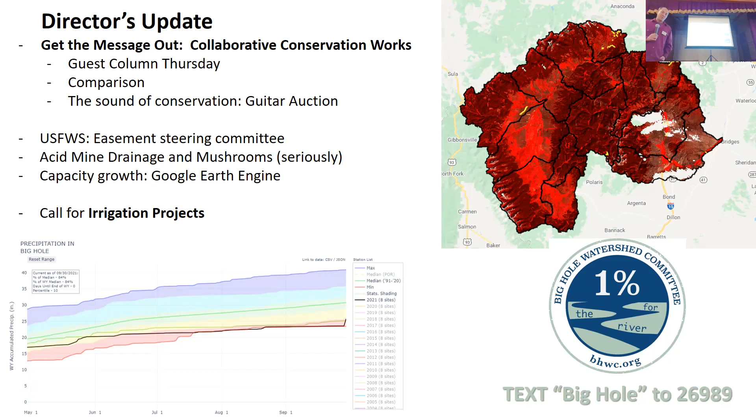His name is Michael Reed. He's the wood buyer for a guitar company, so he procures the wood that gets turned into guitars, and he reclaims wood from abandoned farmhouses in Brazil, harvests it, brings it over, and has stuff made out of it. So this guitar was made out of a 150-year-old farmhouse that was decommissioned - they took the pieces and had a luthier put it together.

So that's exciting - that's the auction, it'll be a 10-day auction. I think it'll launch tomorrow, but if not, it'll be next Thursday, just depends on getting some stuff on eBay set up.

If you know anyone interested in music, plays music, or collects guitars - I figured we wouldn't have an extensive contact list here in this group of those types, so I went to Logjam Presents, a music producer in Missoula. They have a mailing list of 65,000 people, and they've donated about $800 worth of advertising, email newsletters, and social media to get the word out about this thing. So I'm hopeful someone will like what we're doing, want to contribute to conservation, and want an awesome guitar. I thought I'd bring it to show you guys.

Couple other little things on my plate. U.S. Fish and Wildlife Service is starting to convene a group. They've been hearing a lot about interest in easements in the Upper Big Hole - a lot of landowners expressing interest - and they want to convene a group that looks at the progress and status of those and tries to set themselves up, Fish and Wildlife Service, to potentially participate in those and help get some of those actions on the ground as part of grand conservation. So I've been invited to sit on that steering committee, very early stages, so I wanted to let you know about that.

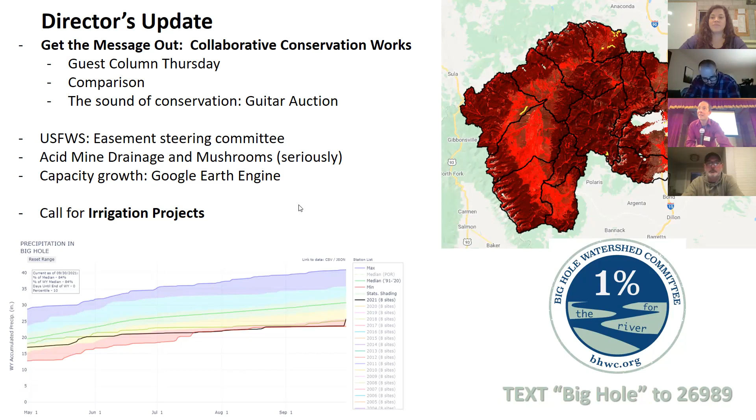Steering committee, any updates? No updates. No updates. Okay. We'll meet soon, I'll send out an email to get us together. We're due for our 3rd quarter.

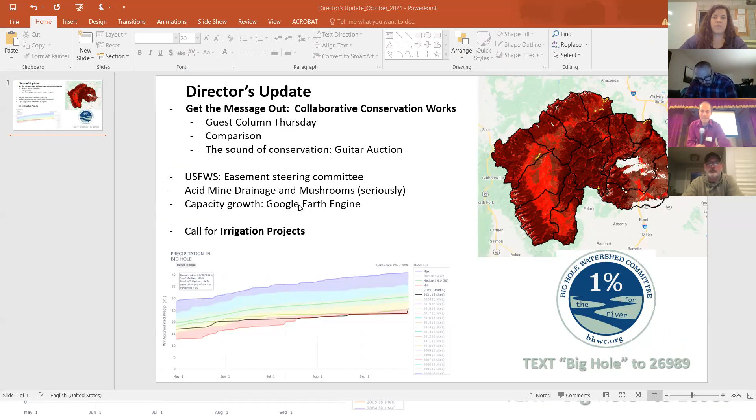Okay, Tana, you up? Okay, yeah, do that. Yeah, that's better. Make sure we get this right, and I will leave you the mic.

All right, I just have a quick wildlife update today. The Range Rider program just wrapped up September 30th, and our Upper Big Hole Range Rider, Chet Robertson, patrols 6 U.S. Forest Service grazing allotments for 7 livestock producers in the Upper Big Hole, monitoring for carnivore activity and looking for dead or injured livestock. He does this to help livestock producers and large carnivores share the landscape. His primary tasks are finding and reporting carcasses so producers can secure reimbursement for losses, keeping wolves moving and aware of his presence, and informing producers of carnivore locations and activities.

So those are the basic tasks of Chet's job, but he also ends up doing a lot of other things that provide indirect benefits to producers and the watershed. A couple things he did this year, besides tracking wolves and bears - he also helped get a wildfire under control. He found a little lightning strike and contained it with his chainsaw, then called the Forest Service and the correct authorities who came and got it under control.

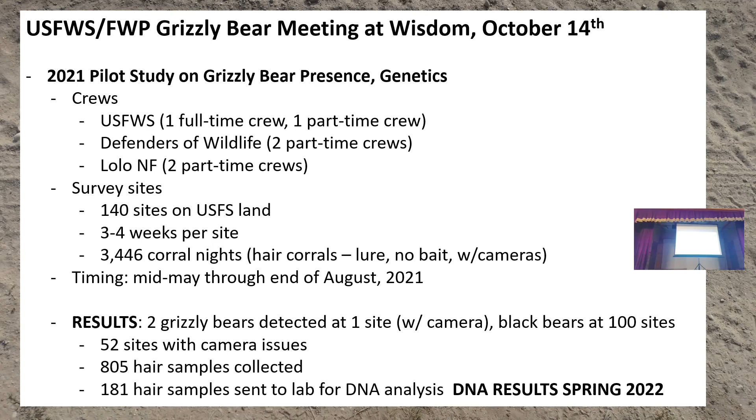805 hair samples were collected and 181 were determined to potentially be from grizzly bears and sent to a lab for analysis. But those DNA results won't come back till spring. So that's a little bit about the study, but unfortunately we don't know the results yet. As soon as we do, we will share them.

So what can we do to prepare for grizzlies? Just be bear aware, carry bear spray, make noise, travel in groups whenever possible, and be especially careful when you're out there hunting. And on your properties, secure bear attractants like livestock feed and trash.

I just wanted to mention that Beaverhead County and People and Carnivores are ahead of the game, because those of you who live in the Big Hole probably noticed they installed bear-resistant lids at the transfer stations. It's pretty slick - you just go up and push a button and it opens, throw your stuff in there and push the button again and it shuts. So kudos to them for being ultra prepared for bears.

And that's all I've got for wildlife. Dean or Jim or anyone else need to add?

I'm involved in work with Western Landowners Alliance on predation, and they have a meeting once a month. Looking at the 4 C's: compensation, control which includes lethal, collaboration, and conflict. Just looking at predation throughout the West and trying to figure out ways to address the impact to the predator and to the livestock operator. Spent quite a lot of time on that. Out here where we're in open space, it's really difficult to use a lot of the practices like fladry and stuff like that.

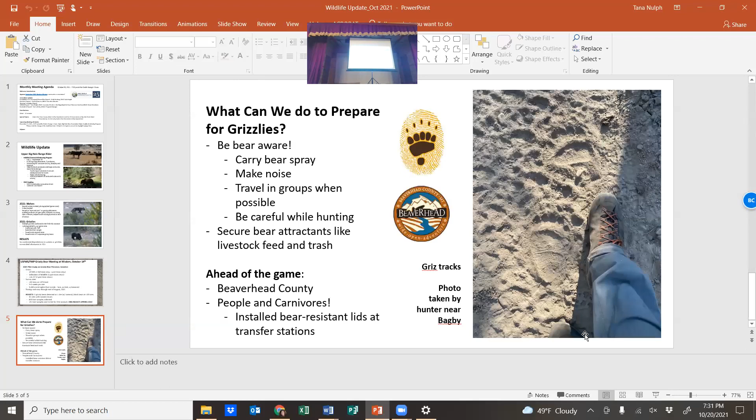Well, I appreciate it, Jen. Thank you for taking the time to be up on those types of things and reporting out to us. Okay, wildlife, we'll move on to Ben. You ready? Should I do it?

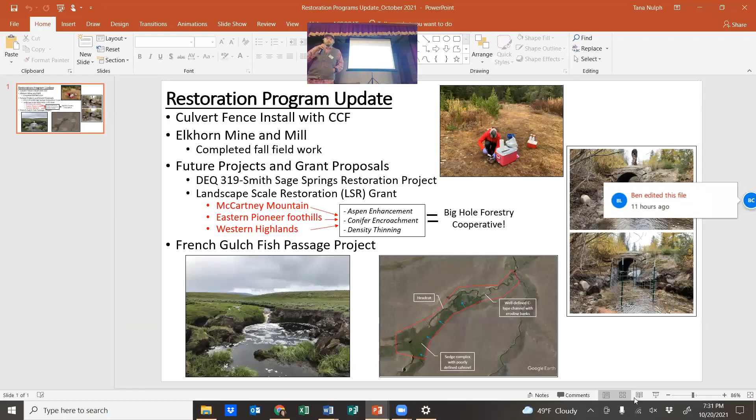Okay, I had a productive month in the restoration programs world. I started off the month - I got invited to install a culvert fence with the Clark Fork Coalition. It was outside of Anaconda on Foster Creek. I know it's not in our watershed, but I thought it was a great opportunity to continue learning about these beaver mitigation projects and these structures.

So I went out with Elissa Schott with the Clark Fork Coalition. She's the beaver mitigation specialist, and she helped us on the 2 projects we did last year. It's good to see a different scenario and learn some of the nuances involved with these projects. There's a before and after photo - basically what the beavers were doing was clogging this ginormous culvert and causing heartache for the landowner. These culvert fences allow the beaver to maintain their habitat and stay on the landscape, and also let the landowner be happy and satisfy their goals too.

So I mentioned it last year, but if you guys have any of these beaver conflicts, then reach out. I think the more and more we do these types of things, we can start to have the capacity to help you guys out and do good things as far as beaver mitigation projects.

We had a productive couple days up at Elkhorn. Pedro mentioned the new grant that we got. We went up there and completed our fall field work.

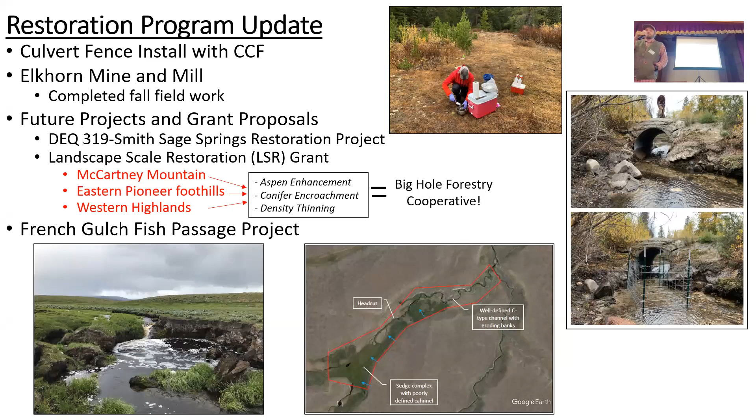Right? Any questions? Right? Okay.

We're open for any additional business or things not on the agenda. Anyone want to cover anything that wasn't covered yet? Things coming up? I have a question for Ben, really quick.

Did you guys get water samples back from Elkhorn results? We did the round 2 that Ben and I went out there, and we got those samples back. Everything's pretty much just the way it was last year, except we did sample below the waste rock pile, and that's super hot.

Max, did you catch that? He said the samples we got was a redo of last year's, and everything's the same except just below the waste rock pile is super hot. We did some new sampling there, and it's of concern for sure.

So you all know, we're in this characterization phase up there, figuring out where the metals are, where they're hottest, what the volumes are, and that's going to lead into the design for how to remedy the site. We have to have a good idea before we start digging around of how deep are we digging and where. That's the phase we're in.

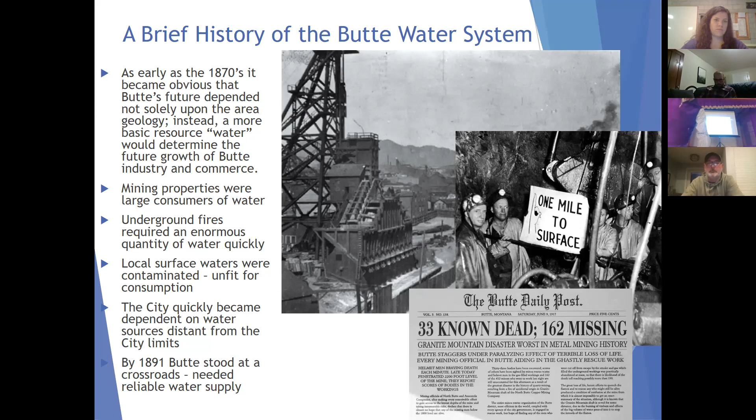In 1891, Butte stood at the crossroads and needed to come up with a reliable water supply. The Butte City Water Company was organized, with Engineer Eugene Carroll in charge of the utility. Over the next decade, Carroll oversaw the transformation of the system from one with a daily capacity of less than 1 million gallons to one capable of producing 13 million gallons a day.

Also back in 1891, the Butte City Water Company promised to spend $2 million to develop the system. $2 million - I don't know how much that is today, but that's a lot.

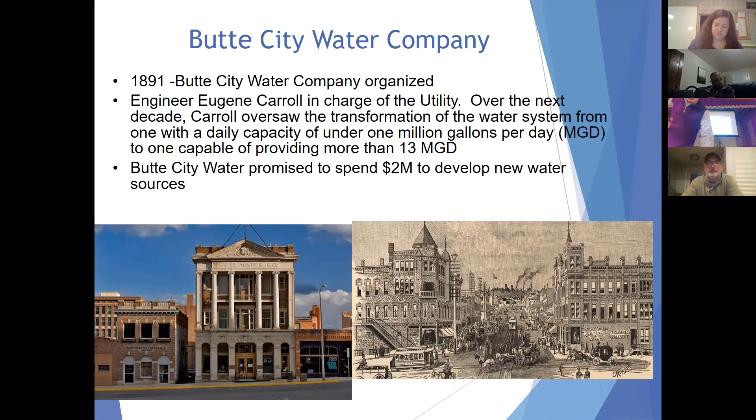So anyway, the first thing they did was build the Basin Creek Dam, constructed from 1892 to 1895. In 1896, a flume from Fish Creek, on the other side of the divide up in the highlands, was built to run water from Fish Creek to the Basin Creek Reservoir. Then in 1897, Basin Creek number 2 dam was built. During that time, the city still didn't have enough water to provide for mining and for the potable water system.

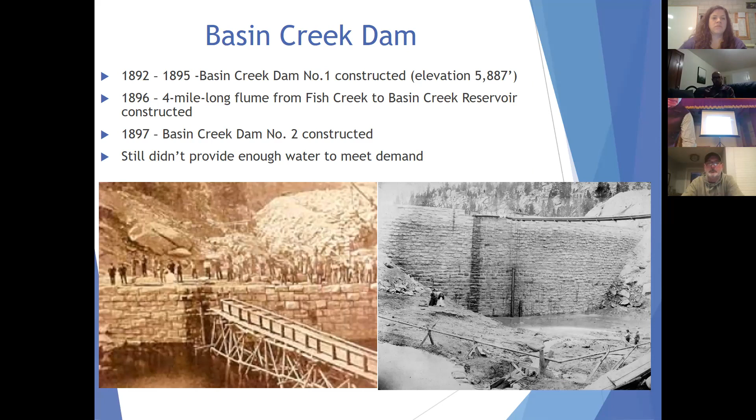Let's just keep going here, and feel free to ask any questions when you'd like. Question: The water rights on Basin Creek and Fish Creek, do you have preceding rights? Coming up, I got this.

Anyway, in 1899, the financial panic hit and the Butte City Water Company went into receivership. In 1901, the company reorganized as the Butte Water Company, and guess who the primary owner was - the Anaconda Mining Company. Question: Receivers, is that like bankruptcy? Bankruptcy, yes. So everybody's a little bit familiar with the ACM. Anyway, of course, the Basin Creek water supply couldn't keep up with demand.

So the city went elsewhere. The best place they could go was the Big Hole River and also the South Fork supply. Of course, the Big Hole is on the other side, on the Atlantic side of the Continental Divide. They pumped water 27 miles from the pump station into Butte, and it was the only system at the time in the United States that moved water from the Atlantic drainage to the Pacific drainage.

Pretty unique in itself. It also involved construction of the South Fork Reservoir up on Fleecer, a 13 million gallon reservoir. From the pump station, they pumped it approximately 700 feet of head from the river up to South Fork, and from South Fork, gravity carried it all the way into Butte. By 1902, the system provided an additional 4 million gallons to the city.

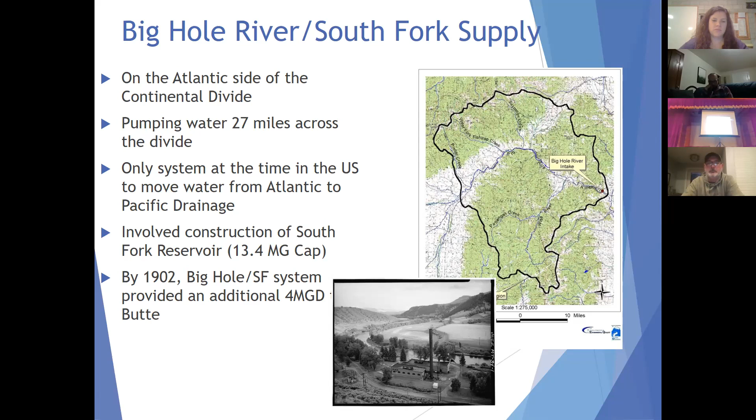They still didn't have enough water, so completion of the system required construction of the Moulton Reservoir. The Moulton Reservoir is about 7 miles north of Butte, north of Walkerville. It was completed in 1907 with a 224 million gallon capacity.

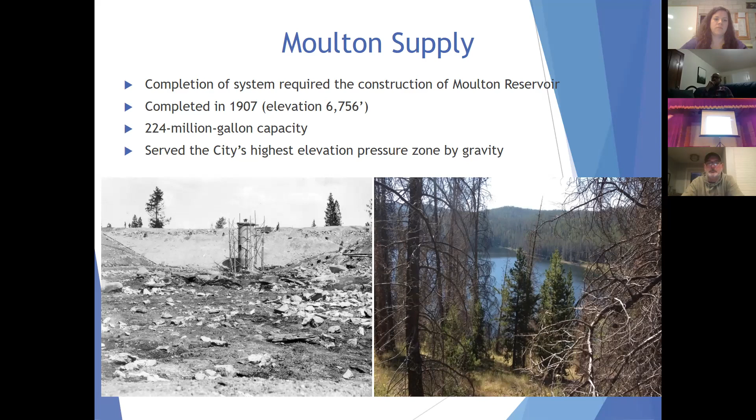That reservoir supplied water to the north end of town, the upper elevations of the system, the highest pressure zones. Butte's pressure from top to bottom is a little over 2,000 feet, so quite a bit of pressure differential there.

Just a little bit more on the history. From the 1920s to the 1970s, the company did make profits, but invested very little in major capital improvements. It was the Anaconda Company, and if you were a shareholder, most of that money was going into pockets from dividends. They didn't put any money into the infrastructure for over 50 years.

Then in 1977, the Anaconda Company was sold to Atlantic Richfield. In 1986, Dennis Washington bought the Anaconda Mining Company, and along with that came the Butte Water Company.

Then in 1990, a class action lawsuit was brought against Dennis Washington by a group of concerned citizens because the water company wasn't providing safe water. Back then, the Department of Environmental Quality issued a boil order in Butte—you had to boil your water before you could drink it. That's terrible, all I can say.

Then in 1992, the Butte Water Company was sold to MERDI, the Montana Economic Revitalization and Development Institute. They ran it for a few years, and during that time, the Fish Creek pipeline was constructed to replace the old flume from Fish Creek.

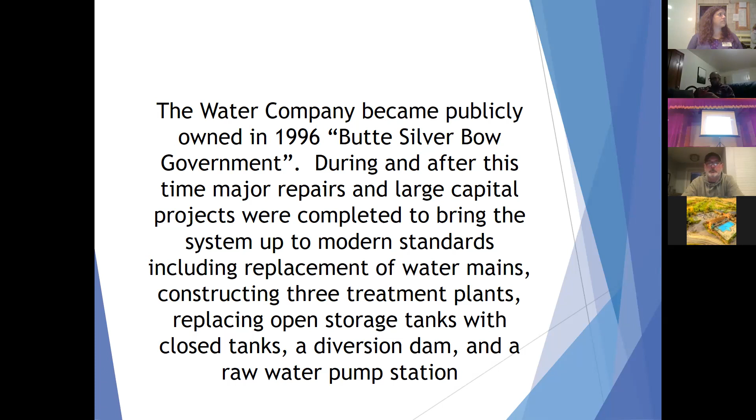It was maybe a 20-year loan, so they're paid off now. So the city of Butte has brought the system up to the standard where it should be today. They invested in the system. We feel that in order to have a good economy, you have to have good infrastructure, and along with good infrastructure, you have to have the resource. We believe that we have the resources, the water.

Here in Montana, especially in Butte, we're right on top of the Continental Divide, so there's no users ahead of us. We're the first user, so water quality is excellent, whether from the impoundment or from the river. We feel that way about rivers too, everybody knows how we feel about the Big Hole River.

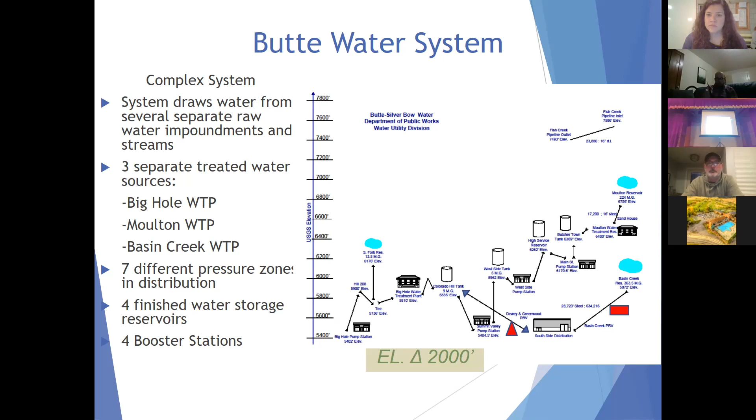The Moulton water treatment plant was commissioned in 1995, with a capacity of 2 MGD. The Moulton reservoir consists of a smaller upper reservoir, 11 million gallons, and a lower reservoir of 224 million gallons. Basically, the upper reservoir, we hold that water back until late summer, just for additional storage. It's not very big, but it helps.

Up in the Moulton drainage, the watershed isn't very big. You don't get a lot of runoff there, but in the past several years, because of the beetle kill, our reservoir is filling to more of capacity, because there's nowhere for that water to go. The trees aren't absorbing it, so it's running into our reservoirs. It's working out a little bit better for us.

It operates to take advantage of the opportunity to serve the city's highest pressure zones. As for the water rights, it's basically Yankee Doodle Creek. The priority date on that was, I believe, 1907. The maximum flow rate is 4.3 CFS, and the maximum volume is around 3,100 acre feet. Basically, we can take as much as we can out of there based on the yield.

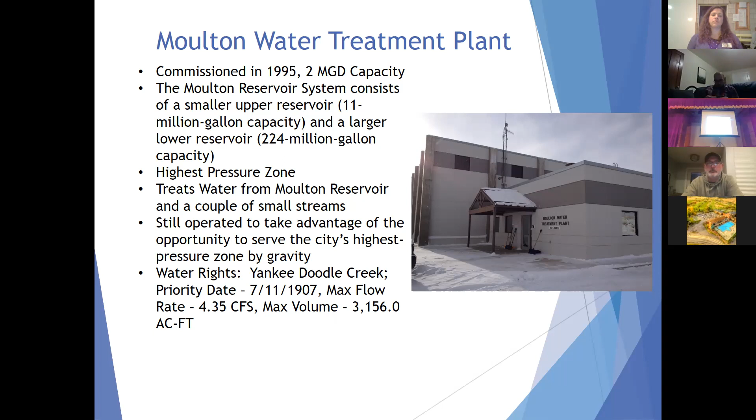The Big Hole water treatment plant, commissioned in 1994, treats water from the Big Hole River and the South Fork Reservoir. The diversion dam alongside the river directs water into the pump station. The pump station is equipped with 5 vertical turbine pumps, each around 250 horsepower I believe. The water is pumped through a 36-inch transmission main, 10 miles up to the Big Hole water treatment plant, on the Feely Hill exit there, right up by Tim Garrison's place. Water from South Fork Reservoir flows by gravity into the water treatment plant through a 24-inch main.

The new diversion dam was constructed in 2010, and the new pump station was constructed in 2012. But the thing is, the water treatment plant, when it was built, was rated as a 16 MGD plant. I know when I was an operator, it's like buying a new car - it says 160 miles an hour, and you put your foot on the gas, and it'll do it for a little while, but you can't sustain that.

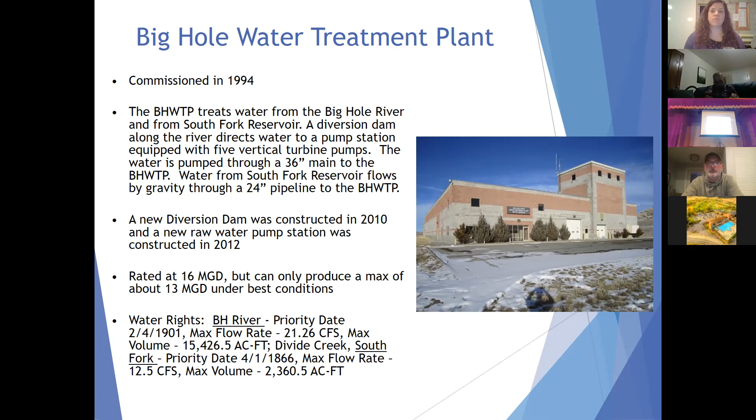Then our next one, this is Basin Creek Water Treatment Plant. Water from the 363 million gallon reservoir is treated with the new water treatment plant. This is a state-of-the-art water treatment plant completed in 2017, the first plant in the United States to employ ceramic membrane technology. The plant has a capability of treating 7 MGD a day.

Membrane technology has been out in the world for 25 years now. Most membrane technology goes through a tube, and the warranty, the life cycle on a polymeric type membrane would be maybe 5 to 7 years. With ceramic, on these membranes since 2017, we have a 25-year warranty on each one. So they cost a little bit more upfront, but for 30 years it's a lot more efficient.

It's a pretty interesting plant. All I wanted to show, we have 400 modules. You don't see any water in this plant. Water comes through all these pipes and through these modules, and it just goes out the door. I'll talk a little more about Basin Creek as we move along, why it's so important to the city of Butte and to the Big Hole River. That's a point I really want to make here. There's 400 modules and one recovery unit.

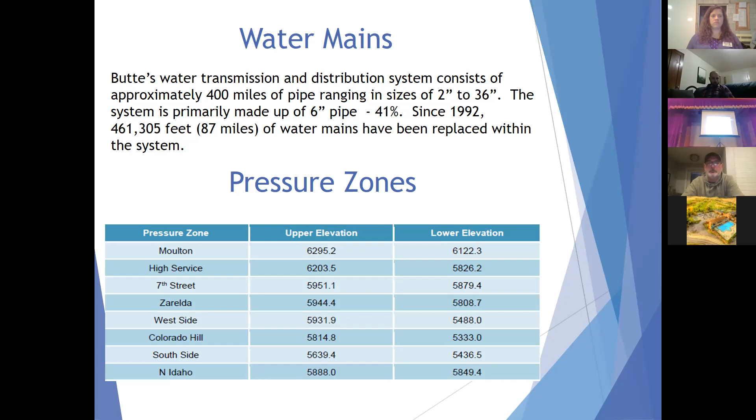As for storage tanks, we have 4 storage tanks. Colorado Hill storage tank was built in 1993, and it's a 9 million gallon storage tank. Coming into Butte from Rocker, look to the south and you'll see that tank up on Colorado Hill. All the water that we pump from the Big Hole system goes to that tank. Elevation-wise, it's sitting pretty high - we can gravity feed water all the way up to a couple blocks below Park Street and still maintain adequate pressure.

Then we have the west side tank. If everybody's familiar with Butte, up by the Big M is the west side tank - that's a 5 million gallon tank. We have a pump station there that's Big Hole water for the most part - we pump water from Colorado Hill up to the west side tank. So basically the Big Hole is supplying the entire Butte Hill and a majority of the south side of Butte.

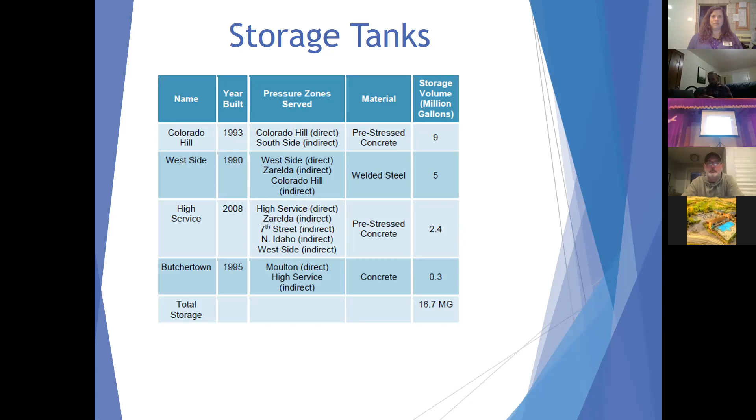Then we have the high service tank north of Butte, that's the 2.4 million gallon tank, and the Butchertown tank, which is right at our base at our Moulton water treatment plant. These tanks help maintain pressure in our distribution system in each zone.

That transmission pipe main from the Big Hole to Butte, I don't know if I covered that, but it used to be wood stave pipe back in the early 1900s, wood stave with bands around it. Then in the mid-1970s that main was replaced with 36-inch used pipe. It was used, not new - they bought it in Canada, got a sweet deal on it, and it wasn't lined.

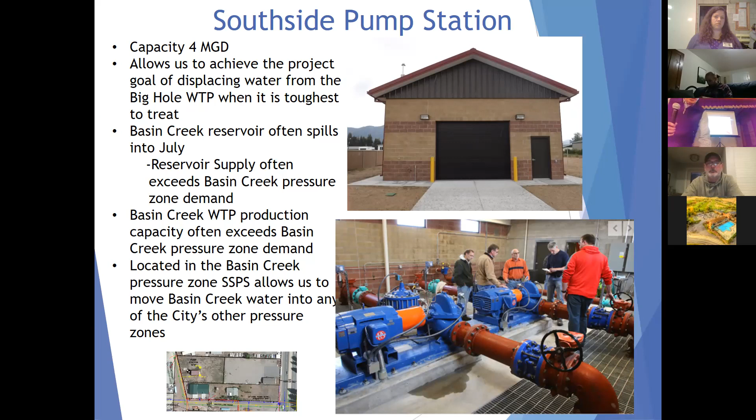Okay, now we're moving on to a different subject. I just want to talk about this summer. Any questions with regard to our system right now?

Mark? Yeah, I gotta throw this up. Where does MRI just get all their water from? Silver Lake, or do you guys supply some of that?

I didn't include that in this because I just wanted to concentrate on this, but Silver Lake, we run Silver Lake, Butte-Silver Bow. It's Silver Lake, the MRI, REC, Silicon Factory, and a few other customers get their water from Silver Lake. Silver Lake is classified as industrial through Montana DEQ.

Water quality at Silver Lake is outstanding. It really is, back then it didn't go through treatment or anything like that. But anyway, it's classified industrial. I think it'd take a monumental effort to turn that into a potable water treatment system for us.

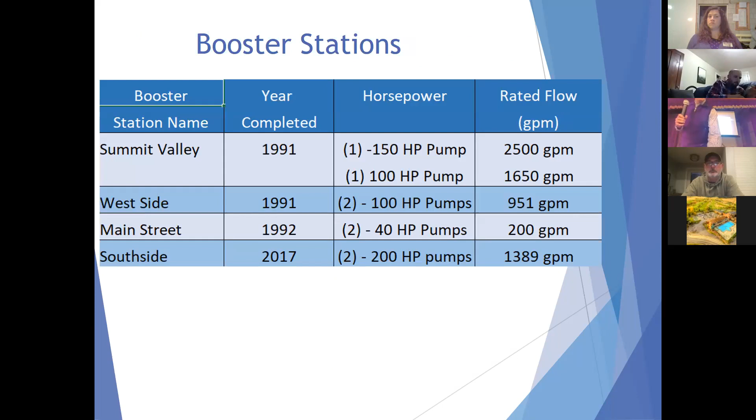And what I'm bringing this up for, what we're concerned with water use on the Big Hole River is, you have a water right up to so many, a little over 15 million gallons a day. And that's approximately almost 5.8 million gallons.

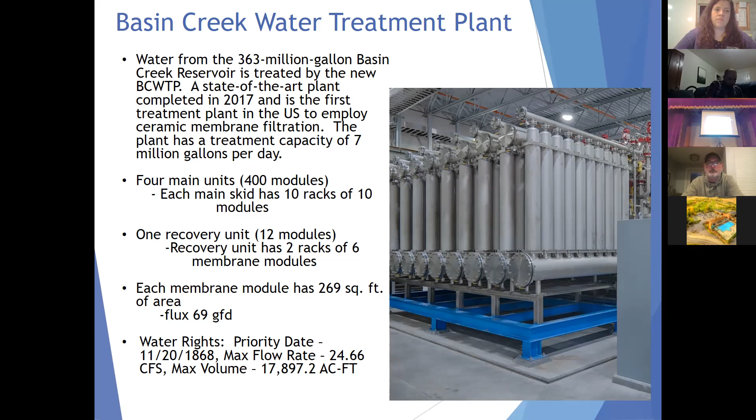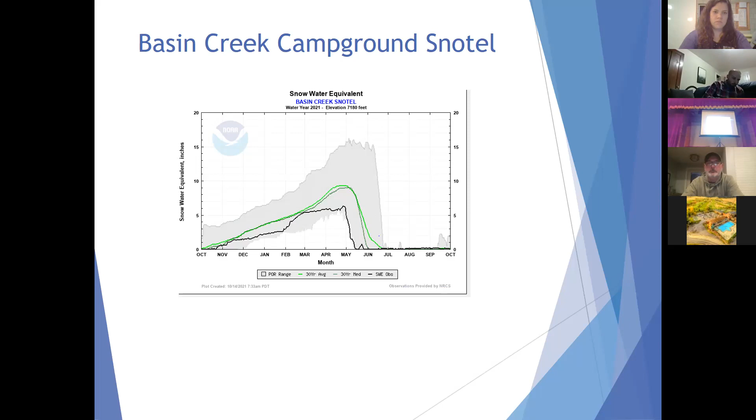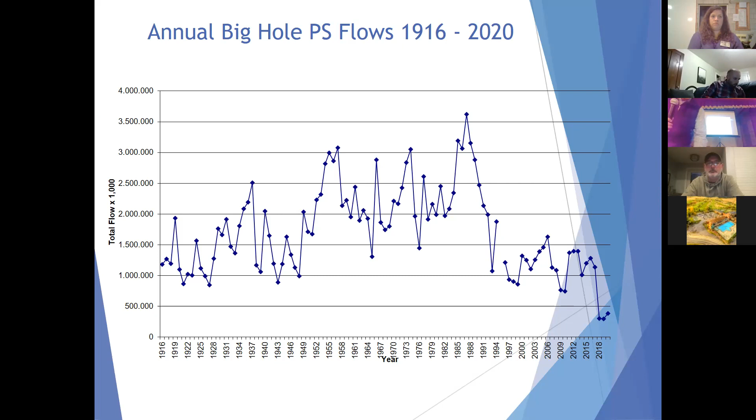So anyway, this is 2020 versus 2021. Lots of water in 2020, no water in 2021. All we're looking at here is Big Hole in blue, Basin Creek in green. For 2020, I did this by month - June, July, August, September, that's the irrigation season, so that's when everybody wants water. It's significant, and I got the numbers, but we relied on Basin Creek - it stood out because we had water, it's cheap water, it's economic, and it's better water.

It's better water than the Big Hole plant - it's just the automation that's involved. Butte Water can hang their hat on every one of their water treatment plants. We abide, we're staying in compliance, and we're never exceeding any violation for some time now. So each one of our water plants provides good water - Basin Creek provides better water.

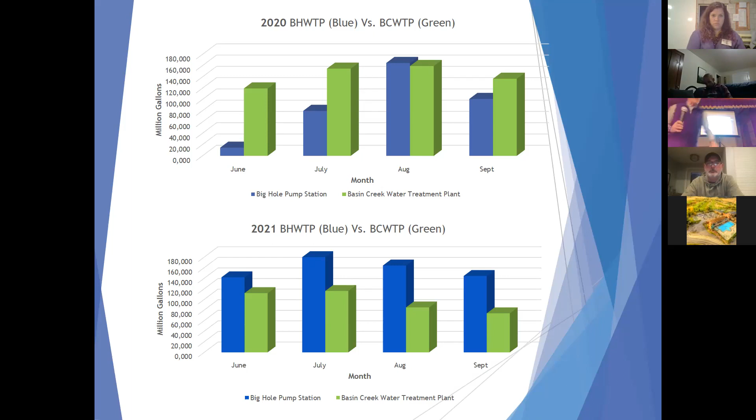From 2020 to 2021, that's 81% more water out of the river than the previous year. And that's all predicated because we didn't have any snow in the highlands. There's no snow on Fleecer either. So we didn't take a lot of production from South Fork.

Basically, for the Big Hole plant, we get the Big Hole River, South Fork, and then we can recirculate a little bit of our wastewater when we do backwashes, 10% of production. This year we did some - previous year we were cleaning the ponds - but significant, this is Big Hole at 61% versus 48% the previous year.

The Basin Creek supply is basically our main plant. I'm kind of looking at the Big Hole now and into the immediate future as - how should I call it -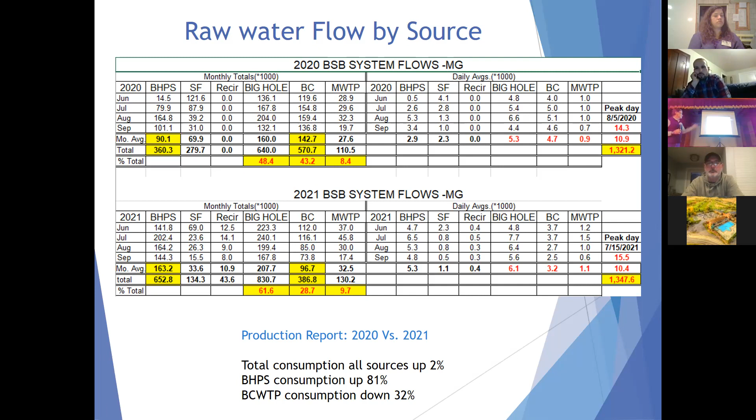So this is pretty telltale, and that's what happened last year. Like I said, the Basin Creek plant is our Cadillac, and we want to use it as much as we can. We want to take as much water out of Basin Creek as possible. What dictates that? Mother Nature dictates that.

So this is what's going on with the Butte-Silver Bow water utility capital improvement project: the Basin Creek Dam #1 rehabilitation. The Basin Creek Dam was built in 1897, but in 1913 an additional 13 feet was added onto the dam. It was concrete, and that top 13 feet is susceptible right now. We have to have it inspected. It's high hazard—all of our dams are considered high hazard because of inundation risk to people below.

The Moulton Dam wasn't considered high hazard until a few years ago. Somebody built a house in the drainage—I don't know how it got done, no permitting or anything—but now it's high hazard. So you have to jump through a lot of regulatory hurdles. How it got built, I don't know.

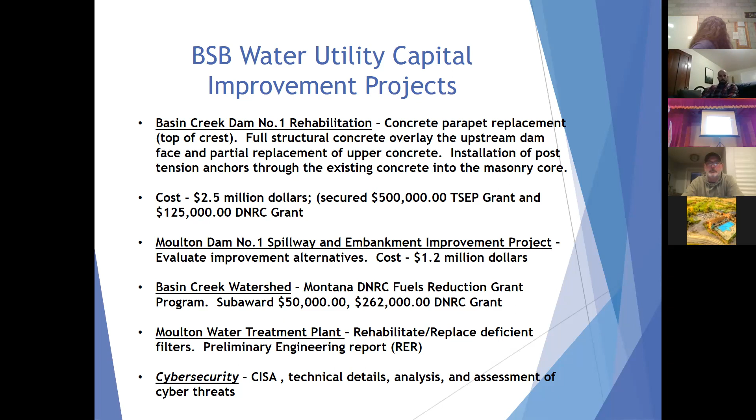But these are basically the projects that we're working on now, and we hope to get all these projects done here within the next 2 years. And then finally, I'd like to talk a little bit about capacity assessments.

What can we do as a utility to optimize our production? First of all, metering. Ideally, in our system, we like to see everybody metered. A lot of our accounts are flat rate accounts in Butte, I'd say 4,500 out of about 12,000 accounts, about a third of all of our accounts. Ideally, we'd like to see everybody metered.

Of course, we could do a water audit, how much water we're losing, where that water is going. Right now, the number of flat rate accounts is steadily decreasing in the community, and we're really pushing that program. This is the philosophy of a lot of people: if I'm on a meter, I kind of know I'm conservative, I don't want a big bill at the end of the month. People on flat rates, they'll use as much as they can.

And then demographics, the Butte-Silver Bow comprehensive plan, the trended population growth. We have been steadily growing for the last 2 years, and in the next 20 years they expect Butte's population to be right around 43 to 45,000 people. So that's more demand.

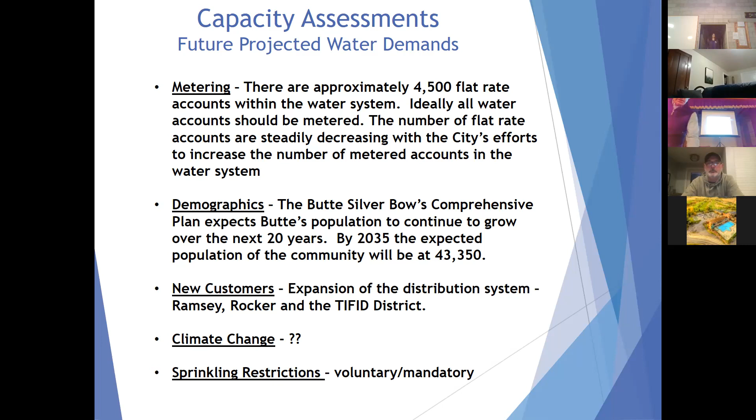That's it. One other thing, any questions? I just wanted to show you this video real quick, it only takes about 3 minutes. You want to ask any questions now, or you want to see this? We'll play this slide here.

This is about fuels reduction in the Basin Creek watershed. The watershed, by the way, is about 12 square miles.

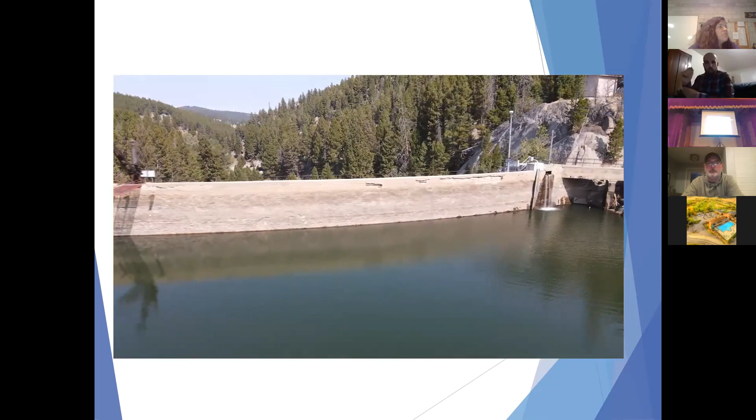In an effort to provide a reliable source of water to a thirsty mining industry and a growing population, construction of Basin Creek Dam started in the spring of 1892 and was completed in 1895. In 1897, construction of a second dam on Basin Creek was initiated a little over a mile upstream of the original dam. For over 100 years, the Basin Creek Reservoirs provided Butte with a pristine and economical water supply, providing around 40% of Butte's drinking water.

In the early 2000s, the entire Basin Creek watershed was impacted by the mountain pine beetle, which led to the death of tens of thousands of mature pine trees around the Basin Creek reservoirs. As the trees in the watershed began to die and lose their needles, the concentration of organic matter in the reservoir increased. This organic matter reacted with the chlorine disinfectant to form a group of regulated disinfection byproducts known as haloacetic acids.

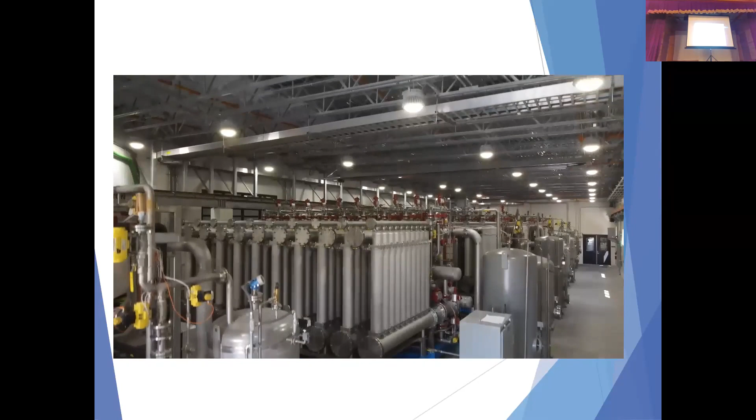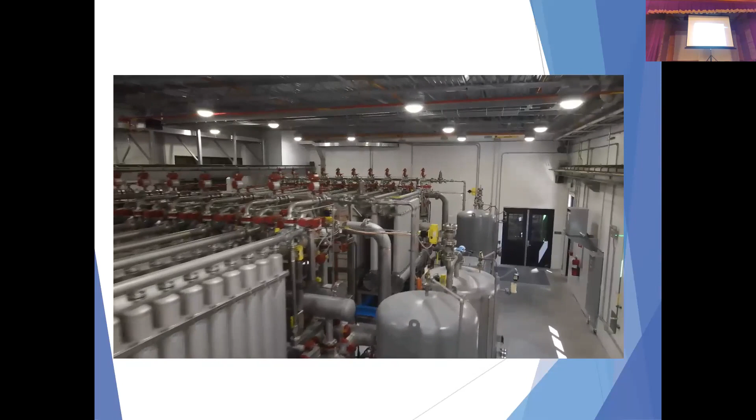The exceedance of the EPA standard for haloacetic acids prompted the construction of the new Basin Creek water treatment plant. The new Basin Creek plant came online in May of 2017 and has since been Butte's most productive and economical treated water supply, producing some of the best quality water in Montana. Since coming online, the new plant has been able to produce up to nearly 60% of Butte's potable water supply.

However, the new plant is not capable of treating water that has been impacted by wildfire, and the condition of the Basin Creek watershed has continued to deteriorate at a rapid rate, becoming a disaster area of fallen and standing dead trees that is a dire threat to the future of the Basin Creek water supply.

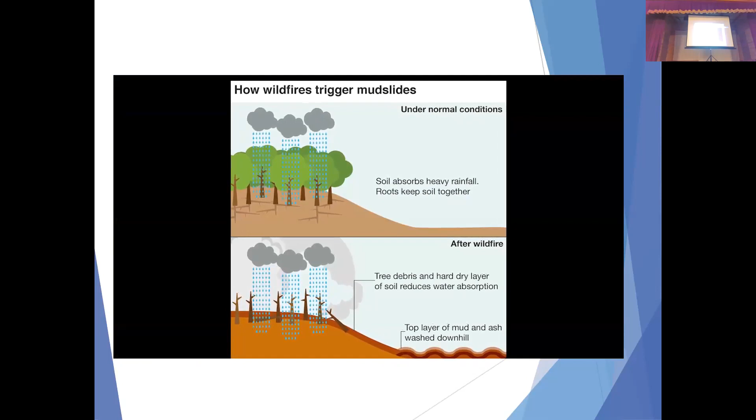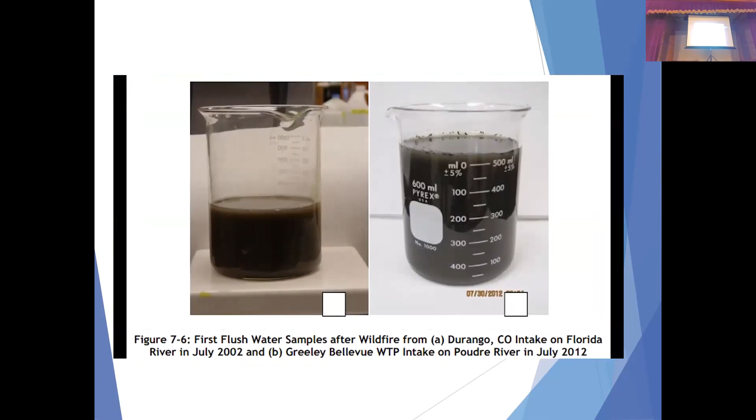If a large wildfire were to occur in the Basin Creek watershed, slopes and hillsides could become unstable, which can fill reservoirs and choke intakes with ash and sediment mobilized by subsequent storms and snowpack runoff. As a result, its most productive and economical water supply would likely be rendered unusable, and full recovery could take a decade or more. To protect the Basin Creek watershed, Butte-Silver Bow is working with partners to begin fuels reduction efforts on Butte-Silver Bow property around the Basin Creek reservoirs.

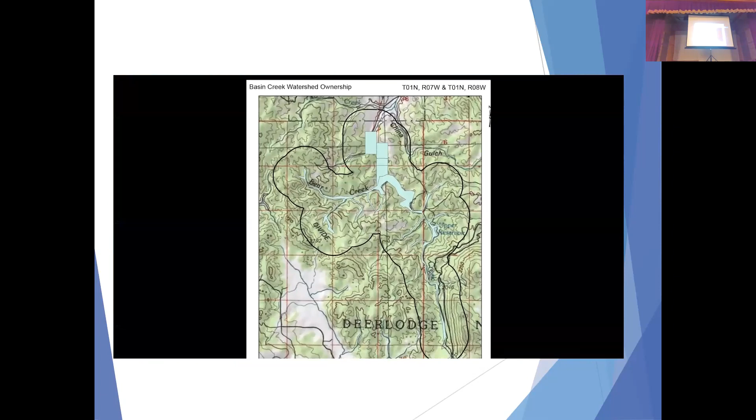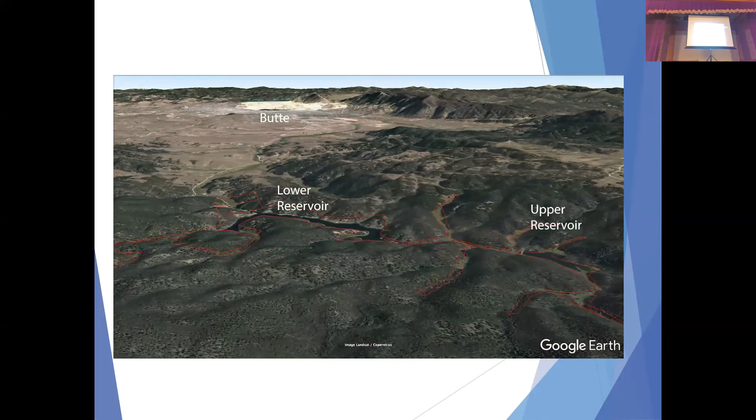However, Butte-Silver Bow only owns a narrow band of property located around the reservoirs and their tributaries, and protecting the water supply will ultimately require a much larger effort in the watershed. The project will likely have to be accomplished in phases with different grants at each stage, in coordination between the Forest Service, Silver Bow County, and other partners. The project will aim to complete fuels reduction on at least 40% of the watershed to protect Butte's most pristine, productive, and economical water supply for many years to come.

That's it. Oh, one thing, as far as energy is concerned - kilowatts per hour, it was in my notes, I didn't pay much attention to it - but Basin Creek supply, including running the Southside Pump Station, costs around $500 per million gallons in kilowatt-hours. The Big Hole treatment facility is around $3,800 per million gallons of water, just in energy costs. As far as other costs, chemicals are pretty close, and manpower is pretty much the same.

Seven times. Seven times more efficient. Anyway, that's it, guys. Any questions?